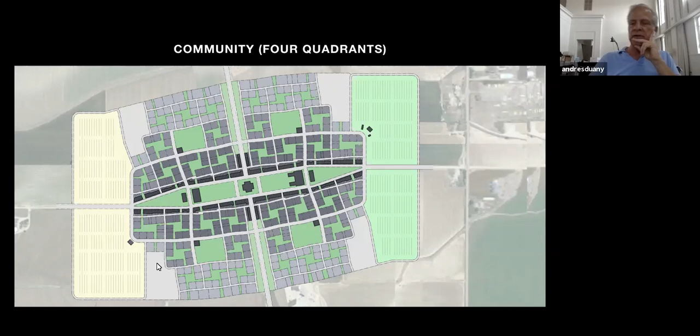And then there's a large unassigned space for activities not yet known. Could be recycling, we don't know what it is, but I think we actually need to leave space open for stuff that we don't know about. Now I'm gonna take this apart like this, okay? So this is the next stage down. This is one of these. So these are the quadrants, but now I'm showing you one of these. Each quadrant has 8 clusters. Okay, so these are clusters.

But the interesting thing about the quadrant is that it has a large space. This large space is programmed by these people. And it is the kind of thing that you can actually vote about what you want. For example, this group may want to have a school, or this group may want to grow vegetables, or this group may want to have a soccer field. But the key thing is you don't have to go to City Hall to decide. It's a much lower increment of decision making.

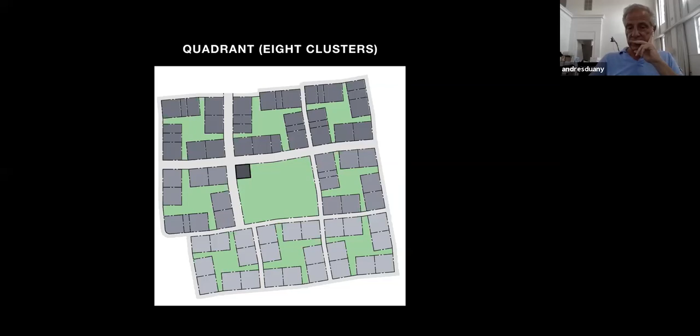Now this keeps going down, okay? So each one of these actually looks like this. And this consists of 8 lots, which are compounds, 1, 2, 3, 4, 5, 6, 7, 8, okay? And this too has a small space in the middle where you might actually build a shed with a picnic table. And something we've noticed is that, for example, in Coral Gables, we are establishing already communities of trust, which are certain selected neighbors that we trust to be taking care of themselves, and we begin to gather socially. But we don't bring them into the house, we bring them to the driveways. There's a lady that has a particularly nice driveway, and we gather there, like an outdoor cocktail party.

And so what happens is that in this situation, with this many number of houses, you can actually know all your neighbors, know which are the ones that you can trust, and have them gather in the center, in a shed, or come together for a little bit of sport, or again, we revert back to education and playgrounds. One of the more difficult things to achieve is to actually trust your children to play.

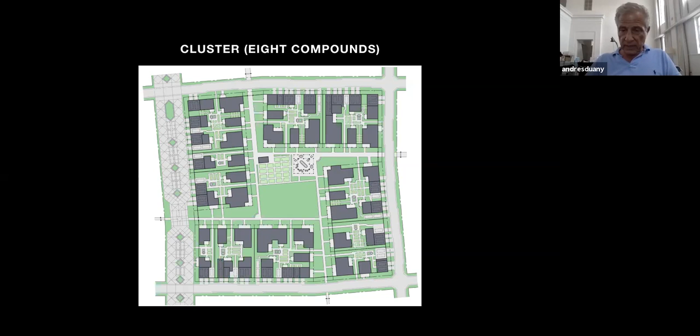Okay, now we're gonna go into one of these. So this is a cluster of 8 compounds, and these are the compounds. The compounds are 120 feet by 120 feet, and they're owned by a single person. But that person is allowed, depending on the transect zone, to build 6 units, or 6 separate buildings, or 5 separate buildings, or 4 separate buildings, etc. You can subdivide slightly to make smaller compounds, but we don't recommend that, because that's just a conventional house with an additional dwelling unit.

Now, what happens at this level is that the owner of the compound, the matriarch or the patriarch, whatever, can assemble the society they need. And that might involve, and it's very particular, a large house, a main house, that then goes on to have a couple of houses for the next generation, and a house for the mother-in-law, and then 3 or 4 young men, some of which are adept at local defense, some at farming, and some at, let's say, repairing houses and so forth. And there may be health caregivers, etc.

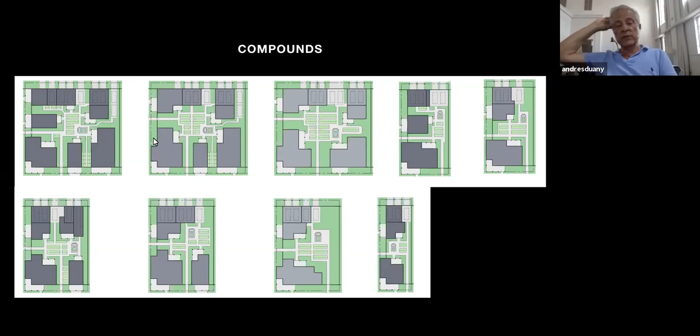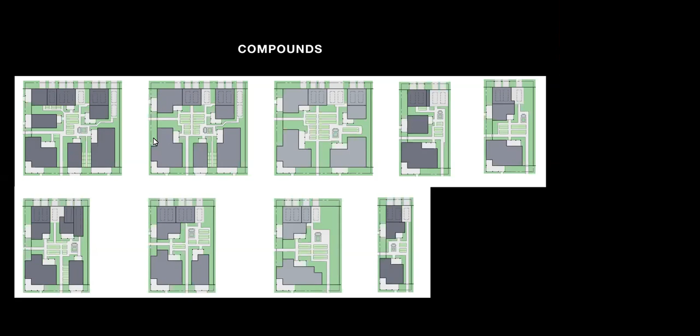So basically, instead of saying ye must all have a single family house, and maybe you can do something else in your accessory dwelling unit, you can say, no, these are complex situations. You can assemble your society according to your needs. And so people say, well, why do you have an owner? Why don't you have a lot of separate individuals owning?

And that came from an experience we had in Boulder, where Corkut and I heard that there were a lot of co-housing developments. And I've always been interested in co-housing. That's the stuff that has 12 units. And we said, can we visit some? And they said, do you want to visit one that doesn't have lawsuits? Because those are hard to come by.

What you instantly learn is when you have 20 people who are equals and the vote doesn't go your way and you're in an oppressed minority, you have recourse to the court of law. So we're kind of hard on this. We say there's a principal owner that actually assembles the society. Now, that owner can actually be put into a small business position by actually renting the other units, not just creating a family.

Something that's not well known, but one of the reasons that Paris redeveloped so well under Haussmann is that the increment of development, which was a small apartment building, maybe no more than 160 feet wide, could actually be done by a single family. So thousands of people could actually become developers, and thousands of them could make just enough income from a building of that size that they actually became landowners and capitalized. And so that's how Paris got built.

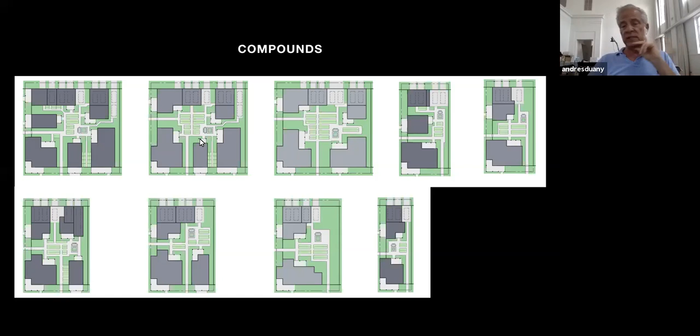Now, I can't go into detail here, but there is a system of subsidiarity of governance, like at which scale can you actually go ahead and what decisions are made at what scale. It's important to realize that right now, the way even new urbanist communities work, there is nothing between your house and City Hall. If you want to do something, for example, a new park, or have an ADU, you have to change the code for the entire city. All of Coral Gables has to change. All of San Diego has to change. This introduces a much lower level, much greater agility, much more like mammals relative to dinosaurs, so that you can actually deal with the very troubled times we're about to encounter.

So these are the 8 compounds. Now, in this particular case, and we've done several of these, the roads are on the outside and the walkways are on the inside. It's a pinwheel which connects to the next. When you have the frontage of the units facing in, these are actually alleys on the rear. And the alleys are much less expensive to build. There are exceptions. This is an elegant street, but almost every cluster has, sorry, I keep picking up the laser pointer. Old habit.

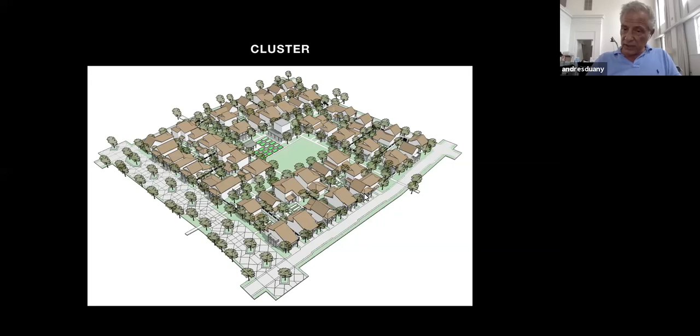Now what comes up is that the garages are on the alley. And so these houses, in some ways, have 2 full frontages. They have the sociable ones in the front that are internal. And by the way, there are gates. But the alleys, which have the garages, are I think the future workplaces. I'm going to make that case very strongly, that the most interesting space in a post-pandemic house is the garage, because it has the greatest flexibility to become a workplace. Converting your living room, dining room, bedroom or kitchen for computers gets really tiresome. But I have seen some very fine garages turn into very chic offices, like little warehouses. So these are no longer considered backs. The garage is now the premium frontage.

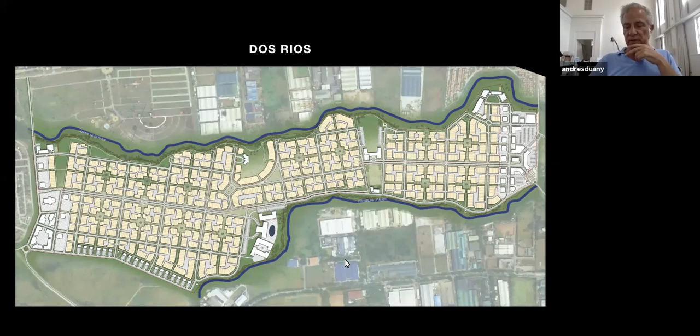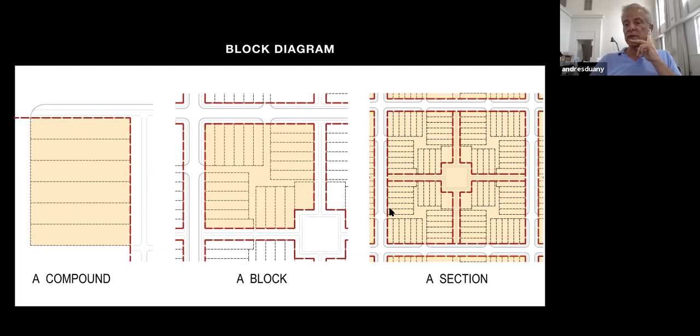And so here's a compound, 6 units. This is a block that consists of 4 compounds with parking in the center. And this is a section or a quadrant, a section in this case that actually has 4 of them. Now, in this case, these are open. These are controlled by the 4 blocks, but these are open to the overall place. And this is what they look like. These are 4 compounds.

And you can see the potential vitality of a system of alleys that actually is pavement. You know, the garage doors, but pavement is where a lot of people hang around, parking lots that are small, and kids love to use pavement because they do wheels and they do basketball, etc. I think grass is overrated as a playground material. Although that's not why we initiated this. We initiated this to protect the cars.

Typical of some of the subsidiarity of decision-making, they will download some of the tax revenue to each level of subsidiarity. So for example, this particular compound or cluster would have its own sereno, a person who's been retained to walk at night, make certain the doors are locked. It's an ancient tradition in which you actually pay for your own security at the level of the block.

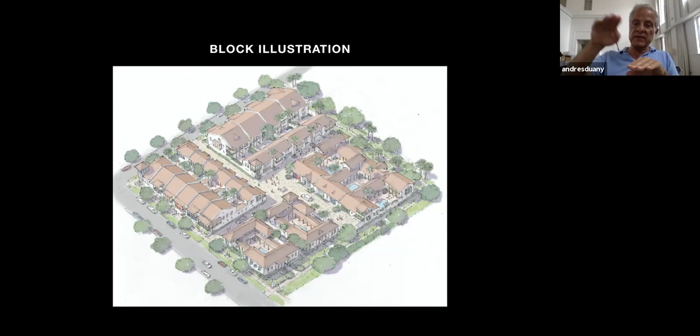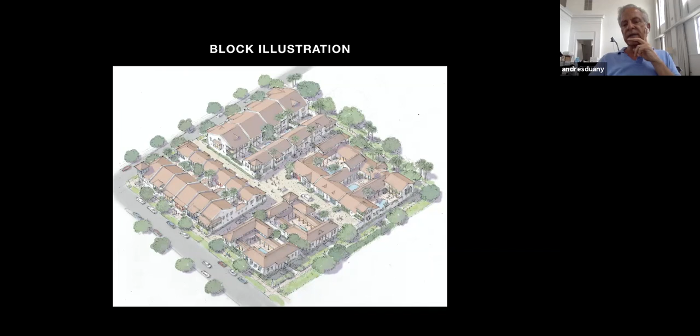So it's also important not only that there be representatives at every level moving on to the next level, eventually getting to the town as a whole to make decisions, and that they're geographically representative, not just generically representative, but we're talking about this quadrant, et cetera, but also that some of the tax revenue be downstreamed or localized so decisions can be made.

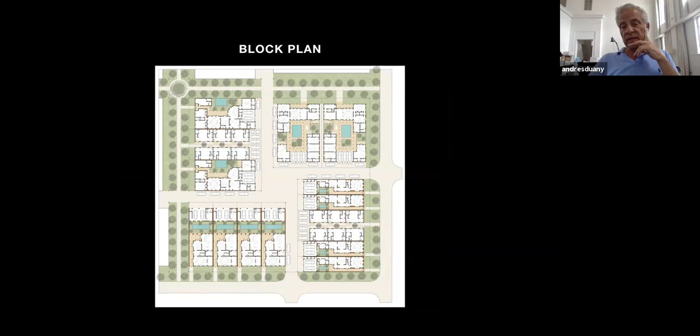And this is what the floor plan looks like. Of course, it's courtyards, which is increasingly the most desirable of the building types, at least in our experience. There's privacy, et cetera, and we'll show some of that. Now, I want to show something that's been designed for another project that we will be submitting next week. And it has to do with actually rationalizing how you design your compound, how it's done.

Now, those of you who know about cars, at least German cars, if you were to buy a BMW and you walk into the dealership, they will say, let me build you your car, okay? Let me design your car, let me build your car. And they get on the computer and they say, well, do you want a sports car? Or do you want a sedan, or do you want an SUV? And you say, well, I want a sedan. Okay, then they say, well, we have

5 different body types, 6, and we have the 2 doors, the 4 and the 6, or no, the 4 and the 7, and then this is a small, et cetera. So they give you a little rap about what the body styles are, and then they tell you what the engines are. There's a 1.8, a 2.0, a 2.8, another 2.8 diesel, and a 3.5. So you choose separately your body, and if you see a BMW, it's the 328 or a 435, what you're seeing is body 4 with a 3.5 liter engine. It's very rational. That's the BMW way they do it.

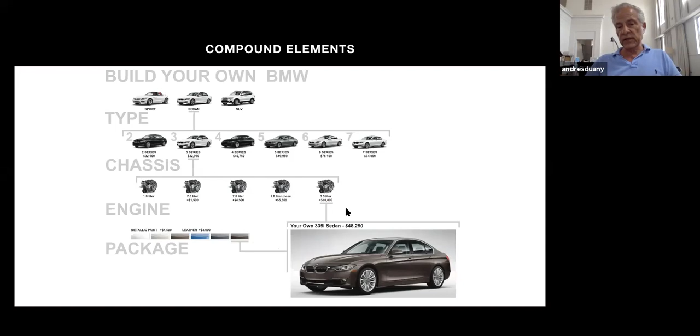And then you get a package, which has to do with the color you want, but also the degree of finish. And then the computer puts it all together and says, this is your car, and it gives you the price. You've designed your car exactly, and you feel you're in very good hands. By the way, if this is too high a number, you can go back and say, look, instead of a 4, why don't you do a 3? They're bigger this year and it'll drop the price $7,000, et cetera. So we're very well in hand.

So we did the same thing for the buildings of a compound. There's a 2-story, there's the main house, which is where the principal owner might live, and it's low on bedrooms but high on large shared spaces like living rooms and dining rooms, because everybody in the compound might gather there. And then there's a secondary dwelling of 2 or 3 bedrooms, some of which have kitchens, some of which have very small kitchens, and some of which are just pure dorms. And then you have places called retreats, where you go to do your thing, because when you're locked in, it's very oppressive.

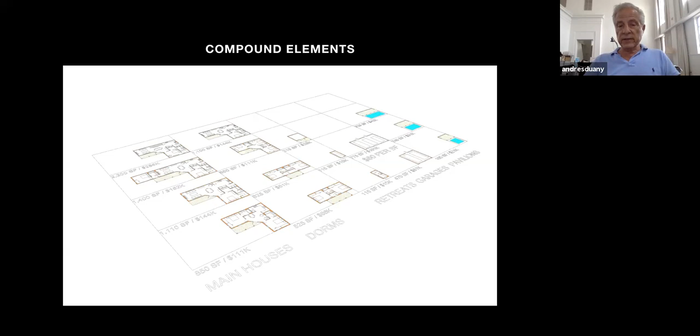And then you choose the number of garages you want, and then you choose the pavilions, probably attached with a pool in the case of Florida. So the way you get taken through it, this gets explained to you. You find your lot, and then you say, okay, so this is what they look like. This is the main house that has 3 bedrooms, if that's what you want. But really, why don't you just have 2 bedrooms, or 1 bedroom and a very large, let's say, great room.

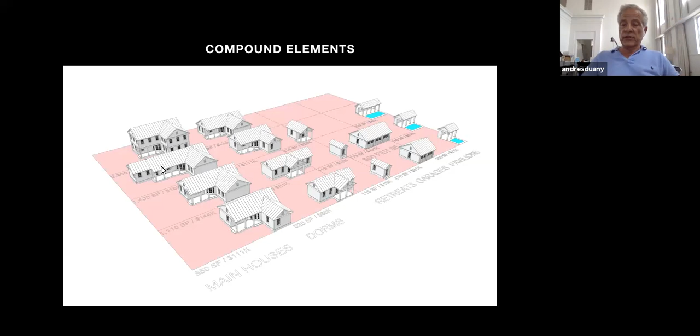And so you're taken through this, you're given the price, and you say, this is what I want. And you choose, okay, so you're taking one at a time. What main house do you want? I want that main house. Okay, fine, got it. And then what dormitory or additional dwelling do you want? And it gets explained to you, you have the prices, and you say, I actually want 2 because I've got a bunch of young friends and a couple of retired people, and you choose 2.

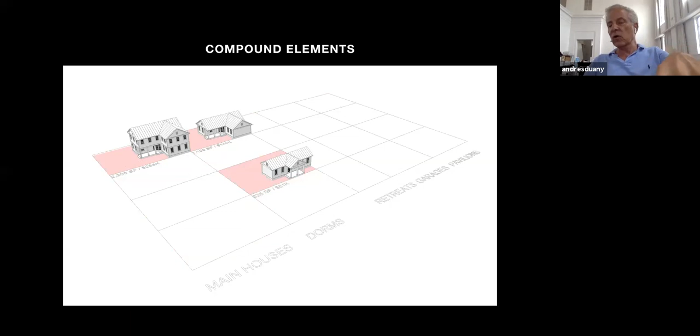Okay, and then they say, well, how many of these retreats do you want? Do people want to do hobbies? Do you want to work from home, et cetera? So instead of sort of scabbing the home work to the house, which is never quite optimal, you buy these. They're available in different sizes. They're designed with all interiors worked out, and you choose 2.

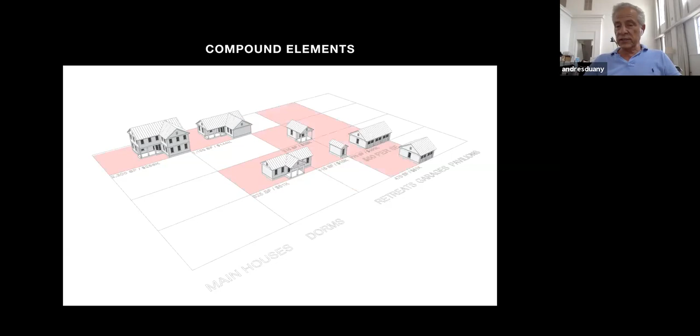And then garages, some people may have a lot of cars, some people less. Many people might choose multiple 3-car garages because they're very, very useful spaces, particularly for workplace. And then you decide whether you want a pavilion and what size it is. So you choose the garage, and then finally you're given the pavilion with the prices. Okay, so this is now your compound. These are the elements of your compound, and you say, come back tomorrow, or we will lay it out for you on the computer, and it may be laid out like this.

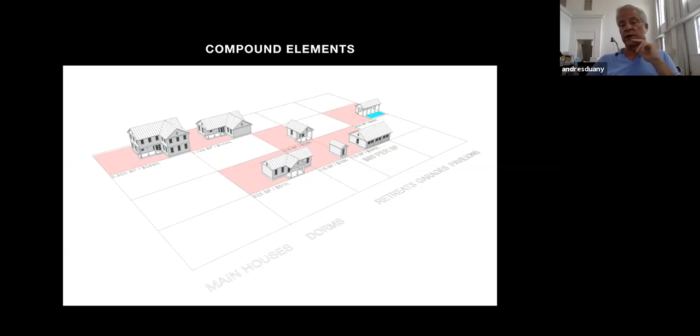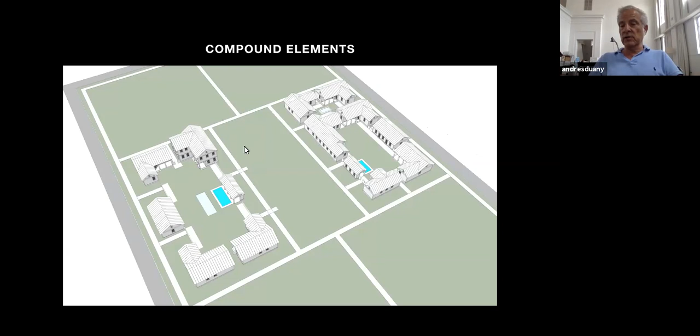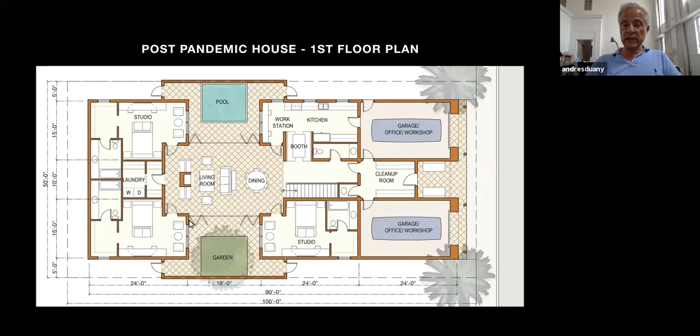But what happens is you have these NanaWalls, these folding doors that open up. And so this space is the very opposite of air conditioned. It's just a roof space, because this is a 50 by 100 foot lot, this is 100 feet wide. So you have an enormous outdoor space, and instead of having indoor-outdoor, you truly don't have indoor-outdoor. This whole thing is one huge thing. You'll hear me repeat that the important thing is not to have a living room, but a media room, et cetera. So that's the first floor.

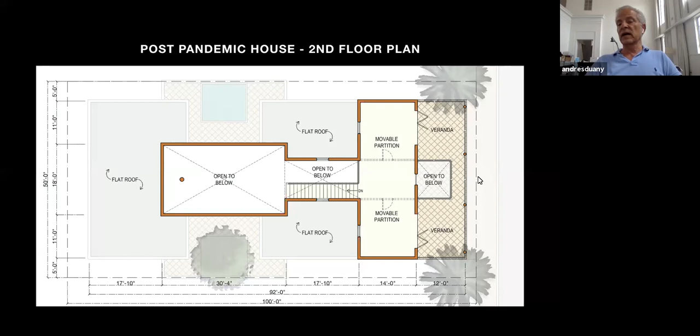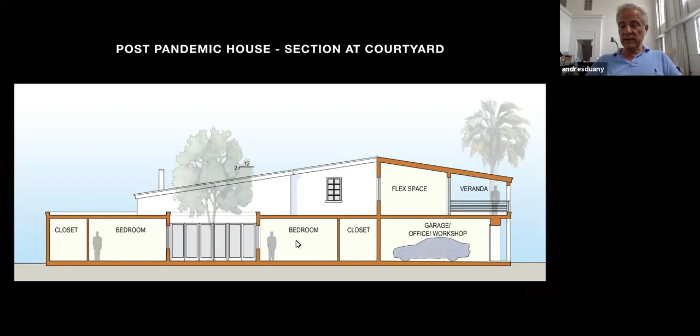By the way, solar panels, not shown from the street, can occur on the flat section. And you can see how large the veranda is, the garage, et cetera. It's a relatively simple house. This is a cut that shows the cross ventilation. Remember you have to have cross ventilation here on the living room.

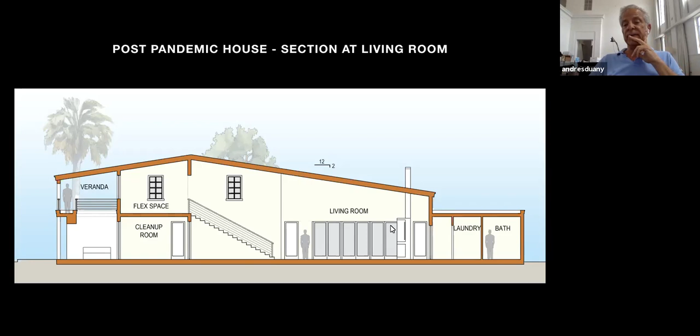Everything's cross ventilated now. When I started designing these things, I said, when was the last time I really thought about cross ventilating every room? It's something we talked about something like 30 years ago. And yes, in principle, we read about it and we're supposed to do it, but we've actually fallen flat on the cross ventilation. It's just sobering to see how often have I thought of that? Not often.

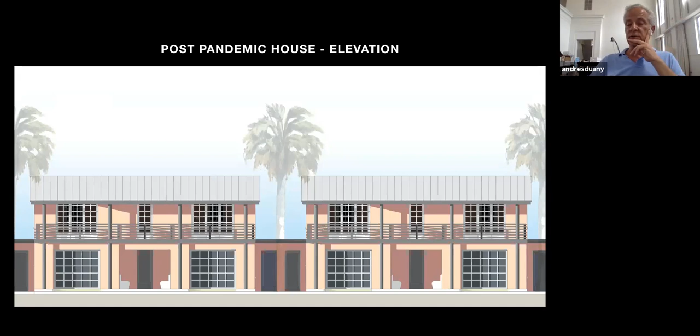So this is the front. It's a very particular aesthetic, which I think has a future. Of course, garage doors are beautiful these days. There are aluminum garage doors that can actually form very good classy offices. And that's the building that I just showed you. Other than the front, which is defensible, the sides are very protected, and you can style it any way.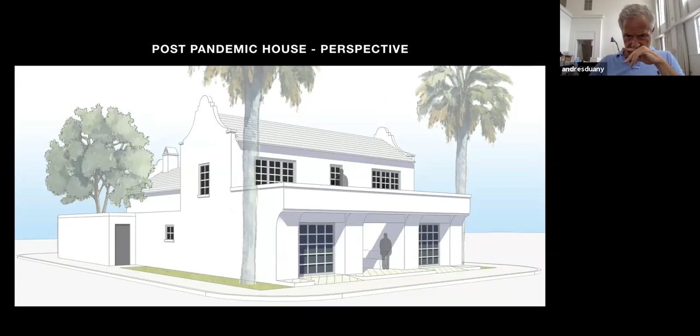This is one we're going to present to Windsor, to see if they bite, for some of their very nice alleys that don't have rear garages. But I think this makes some sense. This is how they stack. It's 7 to 8 units to the acre.

They touch. They're not complete party walls, but they're partial party walls. For example, of course, the back nobody cares about, so you can touch. The courtyards can touch, and you have little slots on the sides for machinery and trash, et cetera. So it's not a party wall building. It's not a complete courtyard building.

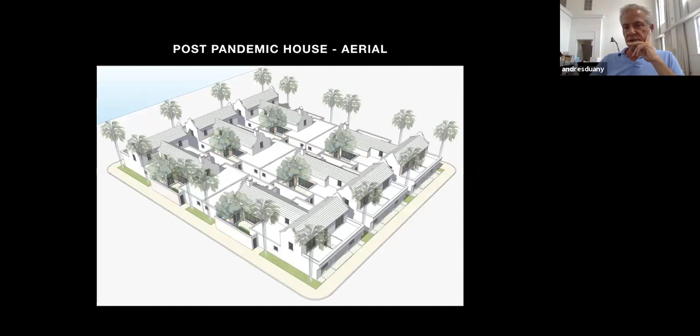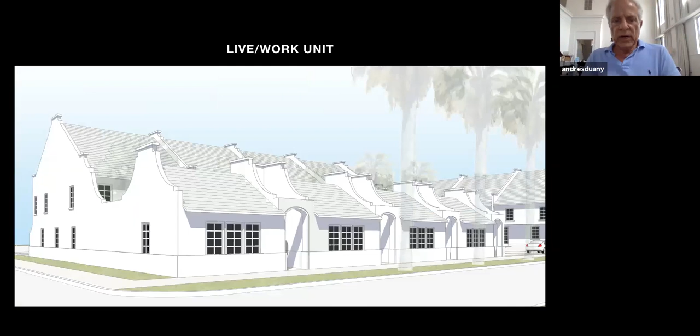What is a live-work unit or a townhouse like? One of the problems with townhouses is that when you bring the living room to the front, you have to raise it from the passerby, right? Because it's at 0 setback, so you have to raise it. Once you raise the living room to the front, you are actually having a difficult time getting to your yard, which is in the back.

So we say, why not have, this actually reverses it. In this case, the outbuilding is in the front. And that outbuilding is much more flexible because it's in the front. It can become an office, it can become a rental apartment, it can become a live-work place without screwing up your floor plan. I think the problem with all the live-work units we've designed is that we put the live-work on the first floor, which means that the work enters the principal dwelling. It totally discombobulates the proportions of the plan. There's too much on the first floor, not enough on the second, and so forth. So why not take the outbuilding and put it in the front like this, and then have a courtyard in between.

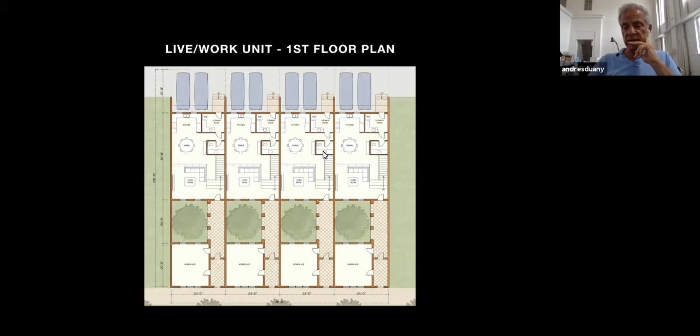So this is what the plan looks like. This is the room that's flexible. You can enter it directly. You can enter it from the inside. It's got a very nice loggia. And then, lo and behold, the living room can now use the courtyard. This isn't correctly done. That would be open here. But the living room is now flush to the garden, which is quite rare in the living room of a townhouse. It might happen in the rear. And the rest is conventional. You climb the stairs and you go up. There's an efficient second floor.

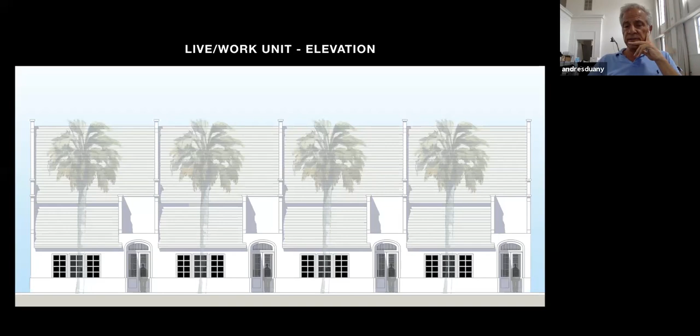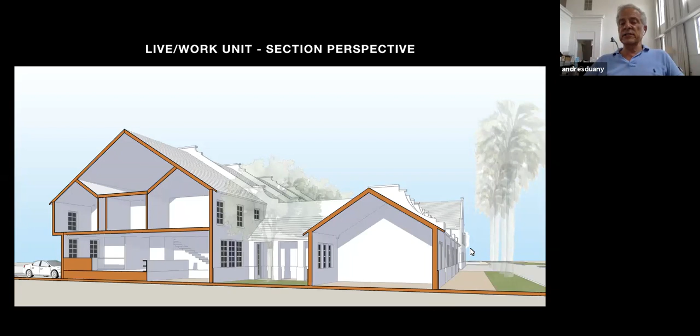By the way, also very good in terms of keeping, remember, the stranger is dangerous until proven otherwise. The stranger is danger. And so you need to kind of buffer from them. And this, I'm not exaggerating, you keep away from people on the streets until proven otherwise. Okay, so there it is. It's amazing, this vocabulary, though, how clearly and easily it solves certain formal problems, like the party wall and so forth.

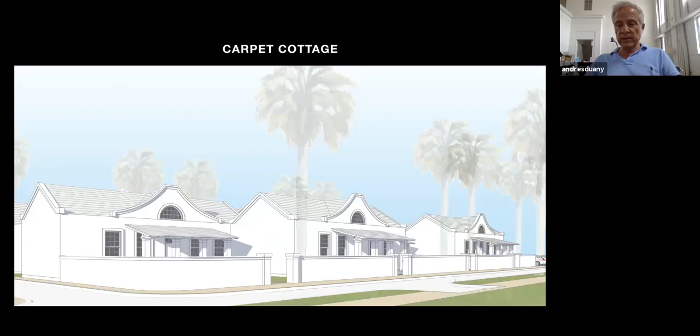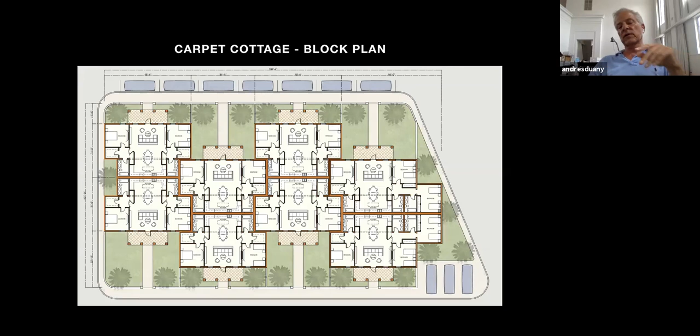And then this is something you've seen before. This is one of our carpet cottages for Alys. These are the units, 2 and 3 bedroom, and they're interlocked like this. They share a great amount. They're all fee simple. They're on their own ground, but they share a huge amount of wall space. So they're relatively inexpensive, and everything's on the ground floor. So this is what we would consider a kind of retirement unit. And that's what they look like.

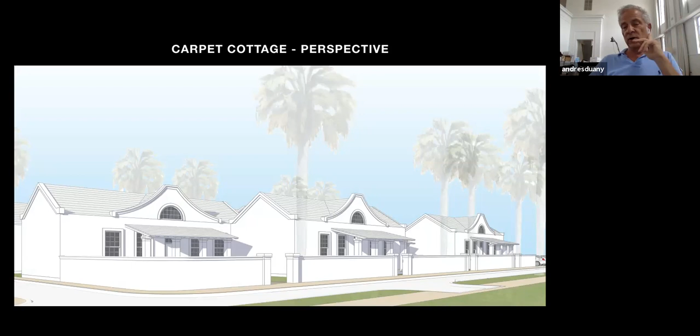They don't look attached, by the way, because as they go back and forth, they don't look attached. They look freestanding, although this actually achieves almost 30 units to the acre. The air conditioning would be on the flat portion in the back.

Now, this is one of the key things. This one is a unit, which is an apartment building. And I think there are a lot of rules for apartment buildings that we have to rethink. One is that they shouldn't be more than 5 stories, because you can walk up the 5 stories. You don't have to get into an elevator. The second thing is that you don't want to live on the first floor, because a stranger is danger, as I said. So you can either have shops, if that's your situation, or you can have parking on the first floor.

The second thing, and this is the single most important, is we've got to be very serious about our open space. We can't just do these narrow, useless balconies that we do reflexively, that are just there to have sliding glass doors to open out, and you can't really use for anything. That space outdoors has to be serious. And I believe it has to be, let's say in this case, 18 by 18 by 18 feet. It has to feel like an outdoor space. It has to actually allow the sunlight in.

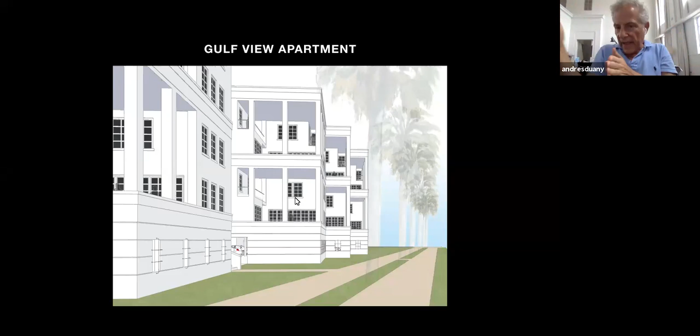And in this case, by the way, you'll see that this is a very weird floor plan, because it's anti-New Urbanism, in that it's echeloned. It's not parallel to the street. The reason is that every street on earth has a breeze that comes from one direction and not another. And since the breeze is absolutely primary, you want to capture it. This is something that is done. Steve Mouzon has written about this, certain ways that Dutch doors open to capture the breeze that's coming down the street. This is what you're seeing here.

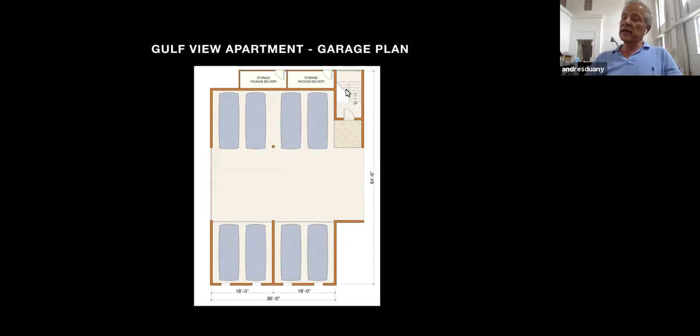Okay, so let's go into it. This is a single unit. What you're seeing here are the 2 garages. These pair belong to the apartments above. These are for guests. You also have this interesting thing, which is where the deliveries take place. They're slightly refrigerated with a very small through-wall air conditioning, $125. Things stay cool while you're at home. And the stair is open in the back and is larger than usual and pleasant enough that you would take it up. There's an elevator, but the stair is not a form of torture.

Okay, now the second floor, which is here on the left, the corridor, lo and behold, is outside. Very, very modernist. And that is because the corridor outside doesn't gather the droplets that apparently now hang around mortal, frightening everybody for 6 hours or 18 hours or whatever the doctor says, in an interior space. So the public space opens like that. It's designed in such a way that you can have one of these outdoor gathering places in which people can speak at some distance. And of course, there's a little office, kind of filter here.

But the main thing is when you enter here, on the right is the bathroom, on the left is one of these cleanup rooms. In this case, not only does it have a sink and a shelf for the UV light, it's got a washer dryer. Because people take their outer garments off there and put them in. I mean, all medical personnel do that. People who've been with infected people do that, et cetera. You don't want to bring your clothes into the house. Then you enter through essentially a double height foyer, and you enter the living room.

Now notice that the living room is actually a media room. I think inviting guests in such a way that you have to impress them because they're semi-strangers is an old way of doing things, and you should really begin with the large screen. The dining room also is much larger than usual because you want a big table, again, for spacing. It's not that more people are there. The kitchen, because it's so often a workplace with computers, has to take the computer seriously. You have plenty of plugs, a place for a printer, etc. This is for the family who likes to hang around here. And then here you see the 18 by 18 foot outdoor space that, with this kind of NanaWall folding door, just flows in like that. So it becomes one thing.

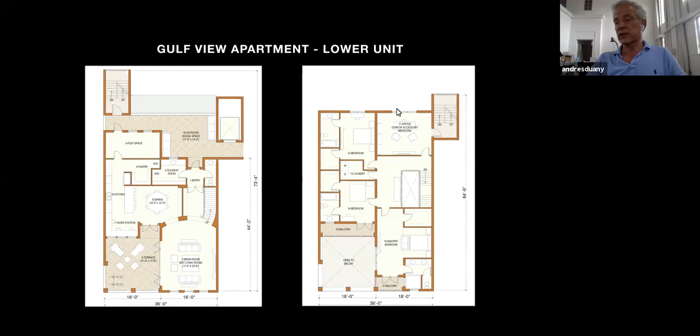When you go upstairs, you arrive at a hallway. There's a master bedroom, etc. There are balconies that look down, so it is activated. This isn't a dead space. The bedrooms can look down on it. And interestingly, a fire stair provides automatically and freely a second means of egress for a special room. This is like an outbuilding. This is like an ADU, if you have a door directly from the fire stair in. This is particularly easy to do because it's a skip-stop apartment. It doesn't have a corridor on every floor. And one of the reasons is to get the cross ventilation, which wouldn't be available if things were double loaded.

And then you keep going upstairs. This is the apartment above, which is identical, but on top, and this is something that's also modernist, the roof garden. The flat roof is a wonderful place for sun, for outdoor exercise, for health, and in this case, a pool.

And in this particular building, the pool is actually put right on top of the fire stairs and elevator that don't need to go all the way up. They don't need to go to the 4th floor. So you have a very strong structure just ready to actually provide a pool like that, which I think would be very valuable. And by the way, barbecuing and all this.

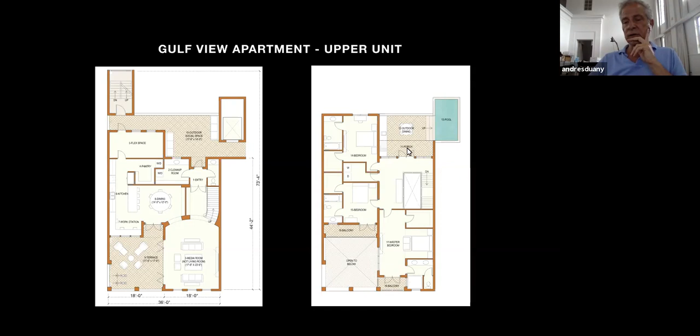Partially, this is the Spanish concept of the patio, which is kept relatively neat, and a tras patio, which is where the mess is, including the barbecue and the people in bathing suits. Okay, so this is the street at the bottom, we think that this particular apartment building should be no more than 6 units.

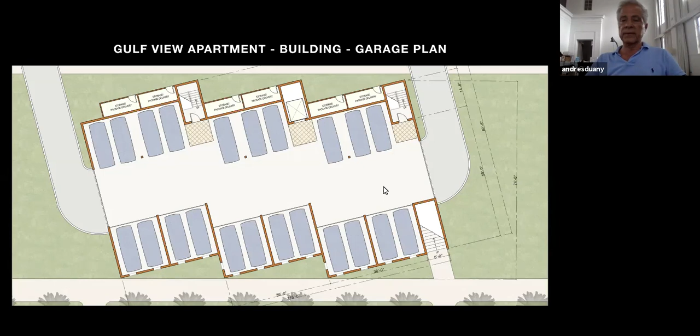Just having spoken to some people in New York, in the small apartment buildings, you're not likely to meet other people in the hallways or the lobby. So we take 6, for example, in this case, to be essential. This is the 3 stacks with the elevator in the central place, but everybody gets the outdoor spacing.

And by the way, I do think that you can maintain street space with this, better than the stupidly articulated modernist buildings that are actually square to the street. This may not be square to the street, but it actually has a very, very strong potential to maintain street space. Needless to say, the breeze in this case is coming from the left of the drawing and coming in. And by the way, not too bad.

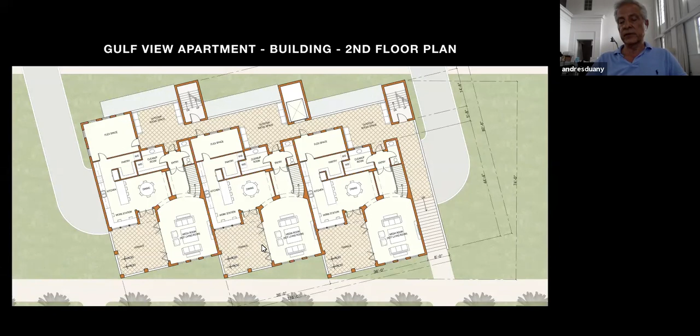Lots of the master bedroom and the living room actually have a long view. You see what's cool about this? This balcony actually has a long view that way. In the case of Alys Beach, for which this is designed, to have a view of the ocean. Like that, and then the upper floor, and then this I already showed you, everybody with a pool. This is what it looks like.

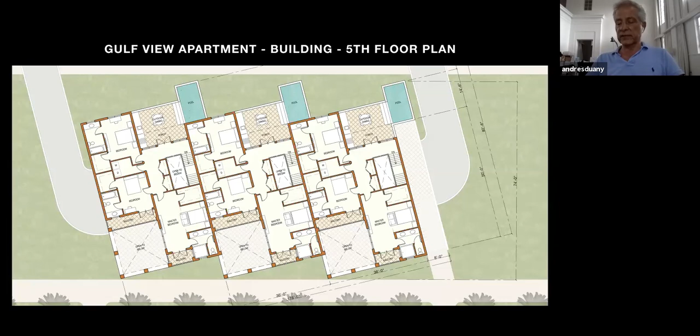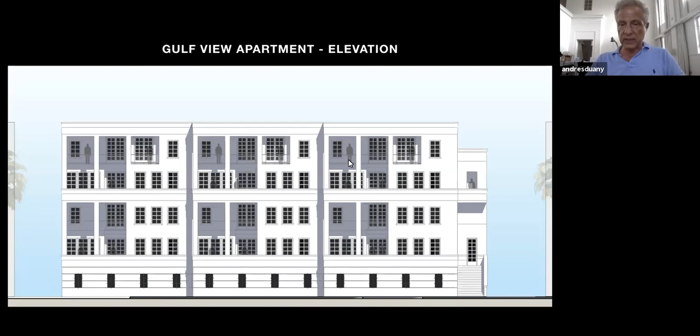Some people say, well, that looks awfully expensive. I don't think so. You saw the floor plan. There's no excessive articulation or funny things. But it does have a spectacular open space that has spectacular possibilities with balconies within, like that. Okay, and this is what the section is like. I think anybody who walks into that will find it rather awesome.

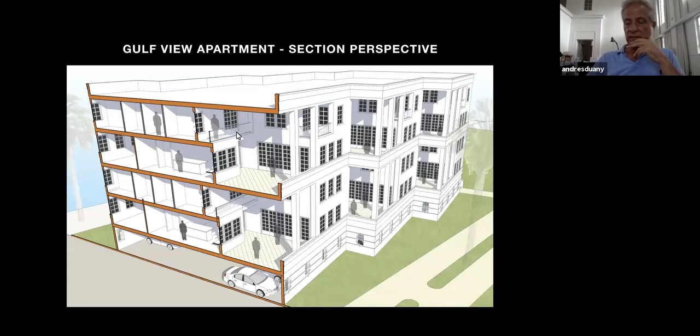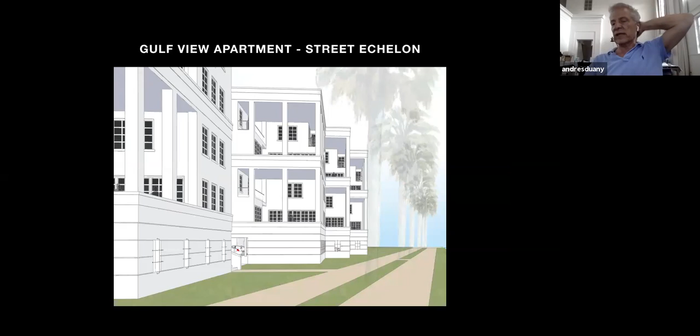This is the street. You can see that it does have potential, I mean, this is not a very developed drawing. And this above all is what you see. Now, yes, the first floor is not inhabited in the conventional way of storefront or anything, but if you've ever looked at a terrace and seen people gathered or having a party in a terrace, it's one of the most enviable and fascinating things you can do. So that's the building. You can see it's not that difficult to build it.

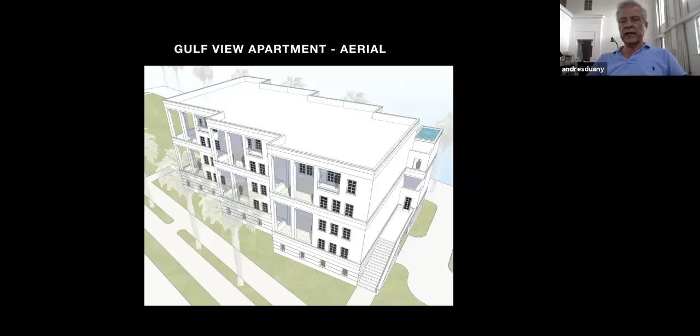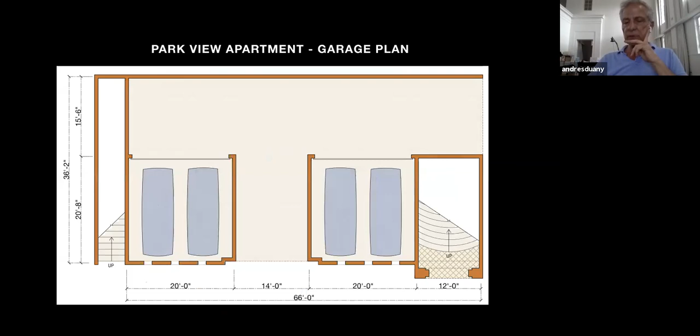Now, this is another one. This is actually a double loaded one, you might say like a courtyard, like a duplex. But this one's actually genuinely like having a couple of stacked houses, a lot of the same rules. There's the parking with garage. This is the first floor. In this case, I'm just going to show you the whole building because it's better assembled. Okay, so this is the building.

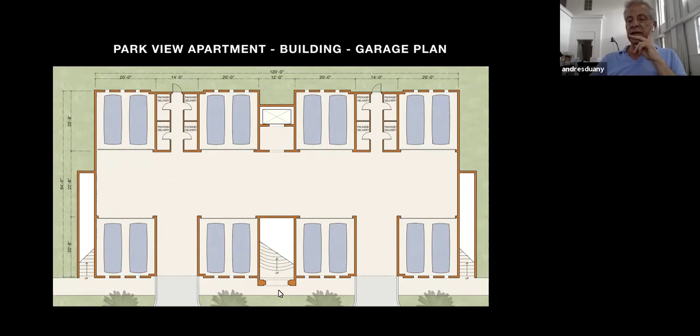It's 8 apartments. And you can see that the garage doors are locked, right? You don't want anybody touching your door handle. And this is where Amazon drops off groceries, etc. Again, with light air conditioning. And you have a stair that comes up if you don't want to take the elevator. There's an elevator in the back.

And then there's the grand open air lobby like this, in which you enter the building here. But you also have a stair that goes in the back. This is the lobby. This is where you bring the groceries in, etc. Okay? And actually it's a villa with a courtyard like that. It's a stacked villa. I think apartments like this are seen only at the very top of Manhattan buildings, in which somebody has a skyscraper and then you see a villa.

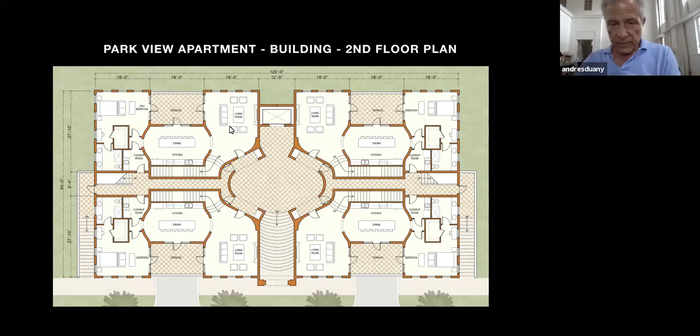But it's a very substantial yard. The upper floor is like this. There's a couple of nice things about it. First of all, the fire stair is used again to enter a separate unit, you see, in the skip stop. So this is a separate person.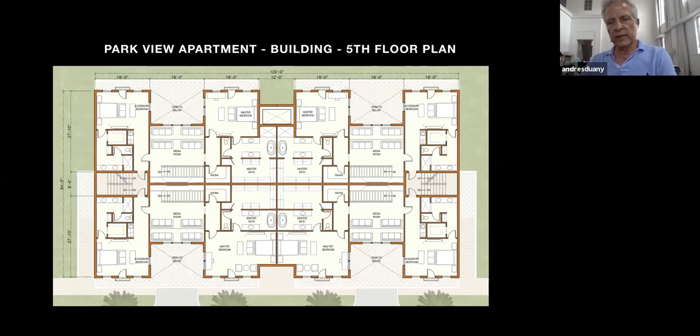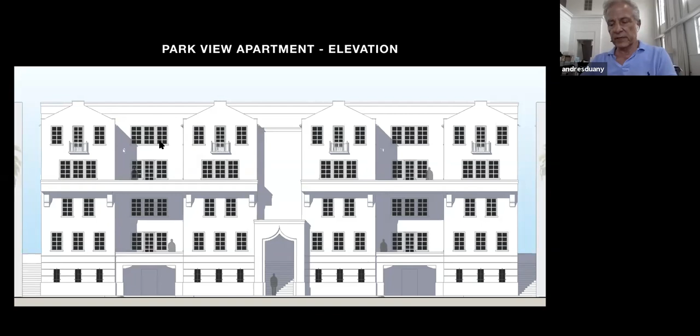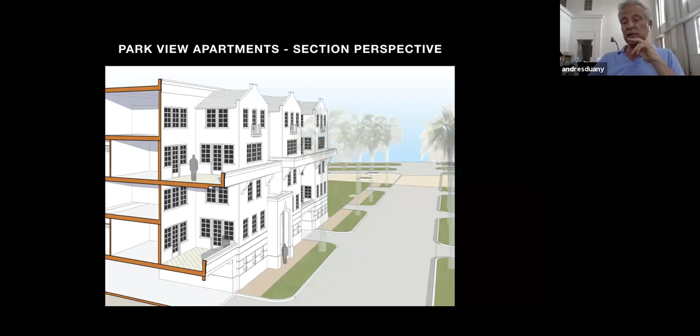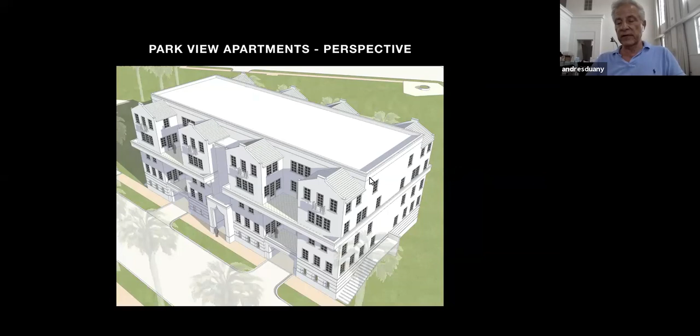So that's what it looks like on the street. And from above, you can see clearly that actually it's not that difficult to build. It's articulated, but it's articulated in a very sober way. It just looks difficult, but it isn't.

Now, retirement. One of the things that is a real loser in the pandemic is that retirement homes are pretty much like sending your relatives to a concentration camp, except possibly with higher death rates. You read of one that 83% of the patients died, 45 died, and so forth. You really can't honestly send your parents.

So this is an assisted living unit, and it's handicapped accessible. You enter. There is, of course, the media, emphasis on media. There is, above all, a sunny courtyard. There is a bit of a play kitchen, because actually your food can be delivered through here, so you can heat it up, or your groceries can be delivered through here, and then there's a bathroom and a pretty nice bedroom, all handicapped accessible, and these are L-shaped units like this.

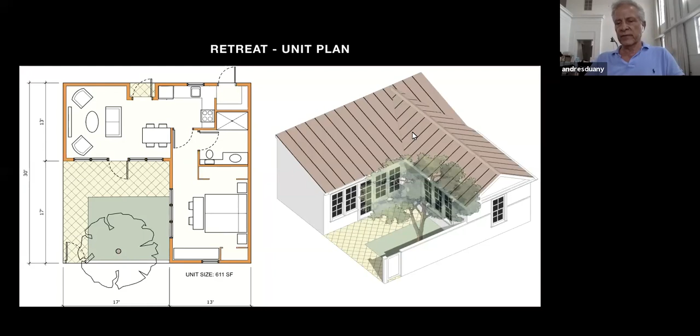And the L-shaped units are assembled very much like the Carthusian monasteries. If you look at the Carthusian monasteries, they don't have monk cells, they actually have houses, L-shaped houses with quite nice gardens. So you put them like this, you put a relatively inexpensive open-air walkway all the way around. You stick 2 buildings in, one which has a big space, like for common dining, or perhaps even for music or entertainment or dancing, and one of which has small rooms for clubs and so forth.

There's a tight paved plaza here, very close to the entrance. So you're at the center of activity and also close to the goings on at the entrances of the two buildings, and then you have a large green space. So there's two entirely different kinds. Actually, if you count the peripheral walkway, and then this and this, there's quite a lot of public open space. So there's a whole hierarchy of open space here.

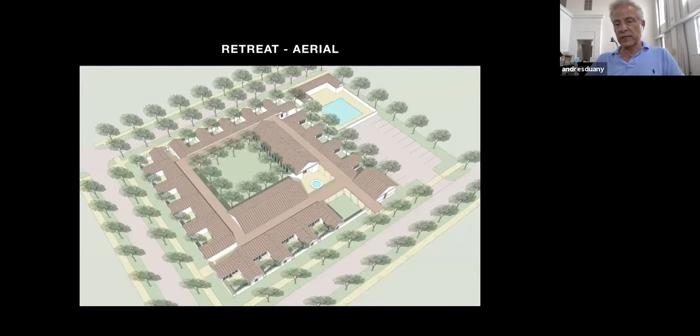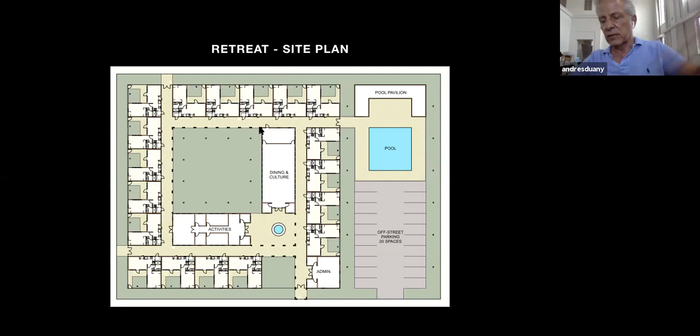Now, you can also tack on, obviously, a pool and a parking lot. Now, this is what's amazing about this. This whole thing from here to here is 190 feet. That's all, which means that it actually fits on a block. This is not something that has to fly in somewhere like a spaceship. It actually fits on a block.

So here you see what I just described to you, and you can see street to street that you can actually just buy a few through lots of 100 foot deep, which is absolutely conventional. Maybe you can buy 8 lots or 10 lots like that and build something within urban fabric. Very, very flexible in that regard.

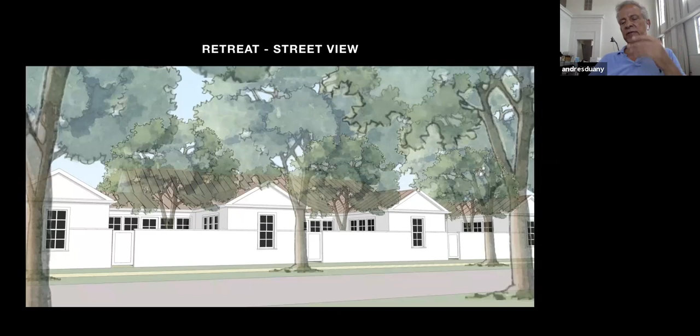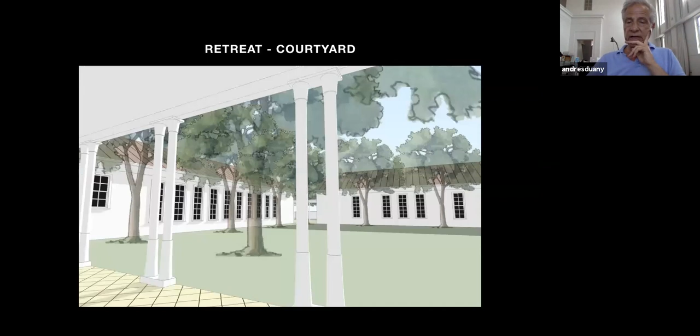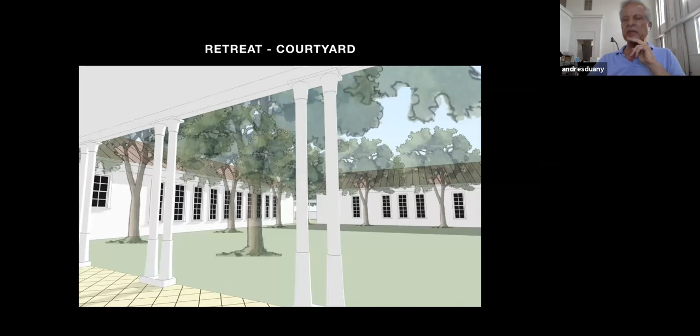The presentation to the street is excellent with some security. Also, your kids can visit if you wish without a lot of hassle. They can go directly into the house. You don't have to be processed institutionally if you don't want. And a very simple walkway in the middle, the ambulatory, which actually just uses steel columns with New Orleans prefab capitals, etc.

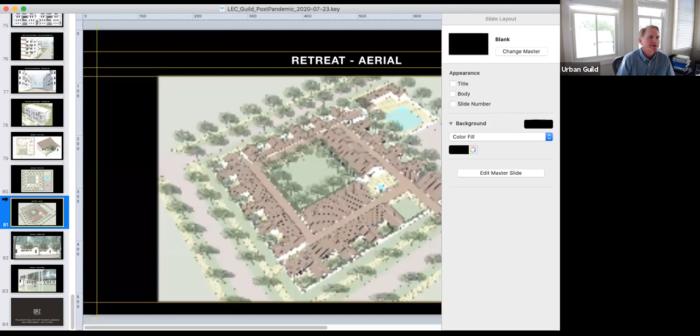Andres, can you go ahead and stop sharing your screen so people can see you a little better? Where's stop sharing? Okay, great. Okay. Would someone else like to ask a question? If so, unmute yourself and ask the question.

I have a question. So the way that you presented it was almost kind of gleeful. Like, oh, look at this terrible thing that happened and this is how we're going to solve it. And I was sitting here as if I was the client, alternating between, wow, these are really novel ideas for interior planning, just even independent of the pandemic, and fear. And so the question is, is there a way that it could be presented such that these are great ideas architecturally?

And oh, by the way, if the pandemic actually does end up happening, these are ways that it could solve that. But there's also the very real scenario that it might just go away and things could go back to normal, which is, I think, what most people want to hear. Because you can look at houses that were built and how much things have changed. Nobody has ice delivered anymore, but houses used to have a room from the exterior where the iceman could come. So if you're designing, say, a glove as opposed to a mitten, shouldn't it be more like a mitten?